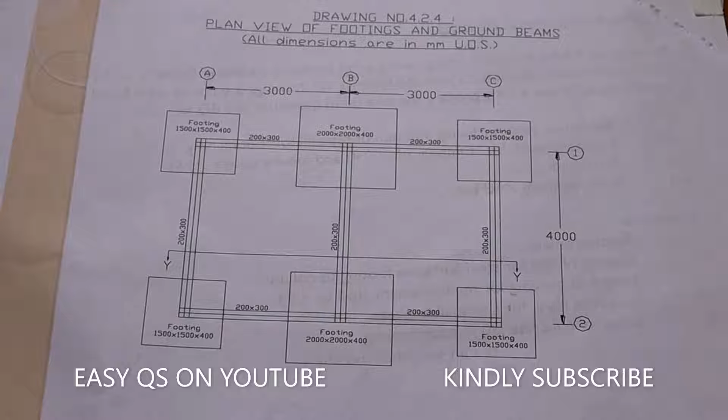You'll be given a plan and a section. In this plan that you have today, it has 6 columns.

There's this column measuring 1500 by 1500 by 400, the size of the footing of the column, and this column is equal to this column, this one, and this one. So there are 4 columns of the same size.

Then we have this other column which measures 2000 by 2000 by 400. The column is this one, and it is the same as this column, so these 2 columns are of the same size. The footing measures 2000 by 2000 by a thickness of 400. These other ones, as we have said, they are 1500 by 1500 by 400.

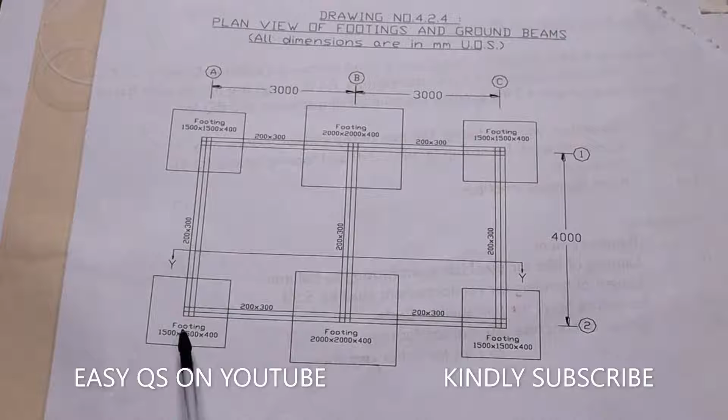The columns are joined by ground beams. You see, in our drawing today, it has footings of columns and ground beams. We know that we are taking off the foundation of the columns and the ground beams. So the footings of the columns have columns, and then they are interconnected by these ground beams that you can see. The size of these beams is 200 by 300.

The measurement of these footings is center to center 3000, center to center 3000. For the width, the width is 4000 millimeters. All right, so that one is the plan.

So we have taken section Y. We are viewing the columns this way. You see the arrow points this way. So we are viewing the columns this way. So in the section, we shall have this one.

So the footing that measures 1500 by 1500 by 400. We can see the concrete thickness is 400. Then below the concrete, we have a hard core of 50 millimeters. The section of this column is the column measures 200 by 200.

The reinforcement is R6. Then the reinforcement at the corners, that is standing, is 4 Y12. Then at the footing, we have reinforcement, which is U. We are told there are 5 Y16 both ways.

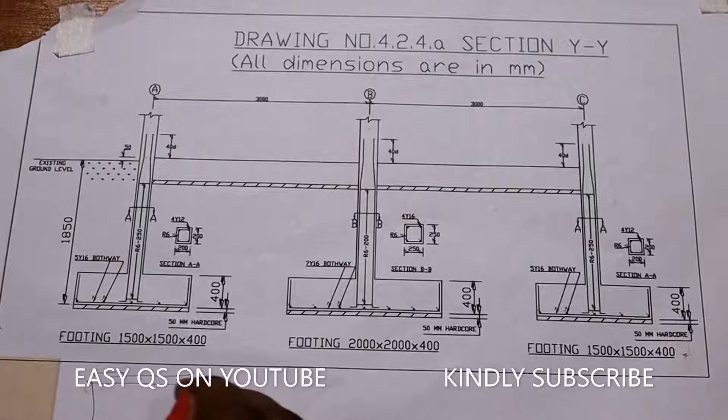So there are 5 Y16 this way, going this way, and also if the column is rectangular, we have Y16 going this way, and also this way. So when you are told 5 Y16 both ways, there are these Y16 going this way and the ones going this way.

Then from the footing of the column, we have these reinforcements that are standing. This part of the column is called the stump. Then this part which has the wide concrete is called the footing. The footing is this concrete below here, which thickness is 400.

The stump is this column below the ground up to where the ground beam begins. Then the ground beam begins from here to here. And we can see this level is below the existing ground level.

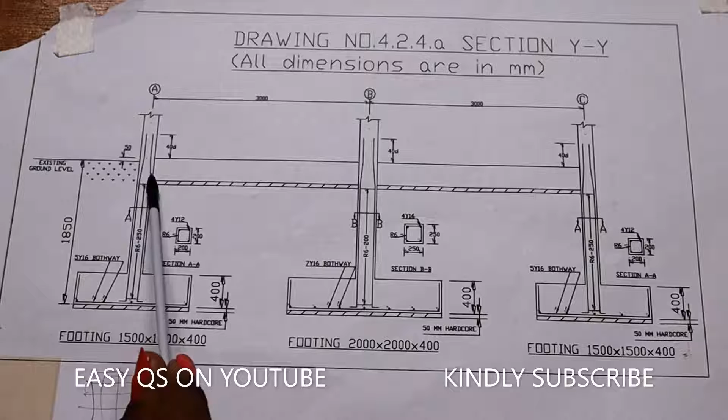Then the reinforcements, when they come above the ground, they should have some extensions which are ready for overlap. You see, the column has to continue upwards. Here it's in the ground. So we shall give an allowance to the reinforcement bars for the sake of lapping with the reinforcements that are above the ground.

When we come to this footing of 2000 by 2000 by 400, we can see it's just like the other one. It has a base of 50 millimeters hardcore. The thickness of the concrete here, the footing, is 400.

Then the section BB, we can see that the size of this stump or the column that is going upwards is 250 millimeters by 250 millimeters. The type of reinforcement in the stirrups are these reinforcements that are going round and round with a spacing. They are R6. The reinforcements at the corners which are going upward, they are standing, they are 4 Y16.

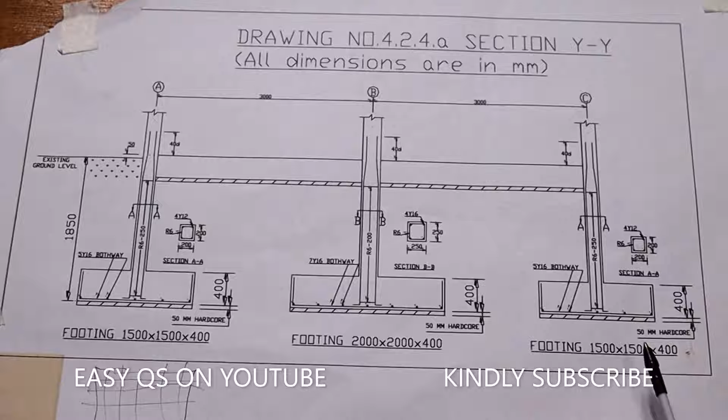So the reinforcement at the footing, it is 7 Y16 and it's both ways. So this way it's 7 Y16 and this way it's 7 Y16. This footing of 1500 by 1500 by 400 is the same as this other column.

So we shall begin the takeoff of the columns together, the columns in the foundation together with the stirrups. The takeoff list.

We shall do excavation work, which will involve the removal of 150 millimeters topsoil for footing only. Then we shall do concrete. We shall measure all concrete work for the stump and the footing.

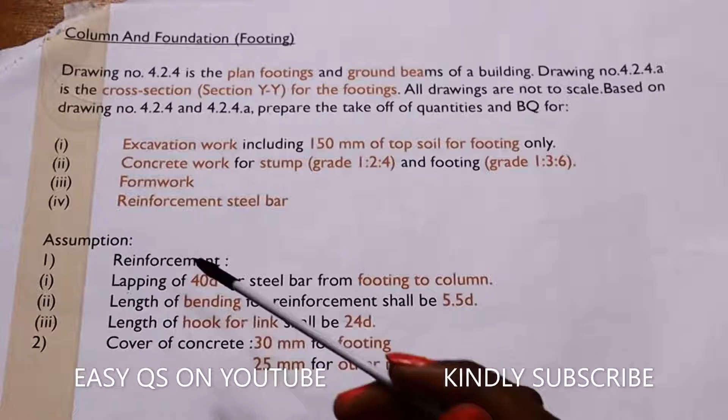We have said the stump is that column below the ground before you get to the ground level. The footing is that wide part of concrete that is under the column. We shall take off the formwork, we need to measure that. Then we shall measure the reinforcement steel bars.

Key things to remember when taking off such a diagram is that for the reinforcement, we shall have some basic assumptions that we use.

One is that the lapping is 40D, meaning if the diameter of the bars is Y12, the diameter of that bar is 12 millimeters. So to calculate the length of the lapping, we take 40 times the diameter, which is 12, divided by 1,000 to make it in meters. We get 40 times 0.012 for the steel bar from footing to column.

The lapping from the footing to the column, above the ground, that overlap that needs to be left, it's 40D. Then the length of bending for reinforcement shall be 5.5D.

What do I mean by this? The bending is this: in reinforcements, we always have bars that look like this. It's a straight bar, then it has bends at the corners, at the ends. If you want to calculate the length of this bend, you take 5.5 times D. So if it is Y12, like D12, you take 5.5 times the diameter, which is 12.

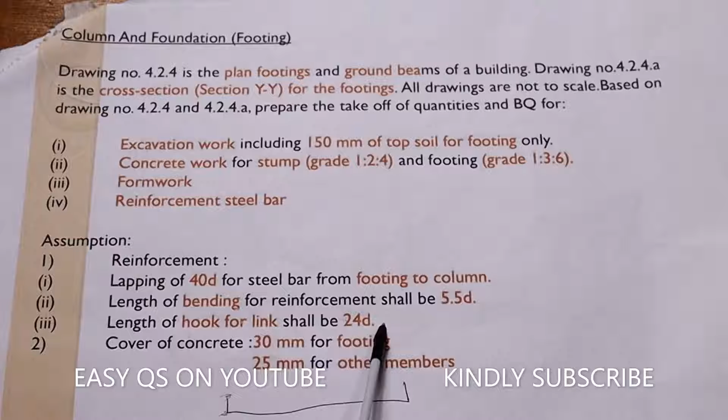The length of the hook for a link shall be 24D. The link is the stirrup, which is usually like this: a straight bar with ends at the corners. We have reinforcements at the corners, 5.5 times. So the length of the hooks at the corners shall be calculated as 24D. These are basic formulas that we shall use.

Then the cover for the concrete: at the footing, the concrete cover shall be 30 millimeters, and for other members, like the ground beam, it shall be 25 millimeters. These are some of the things to note when we are taking off.

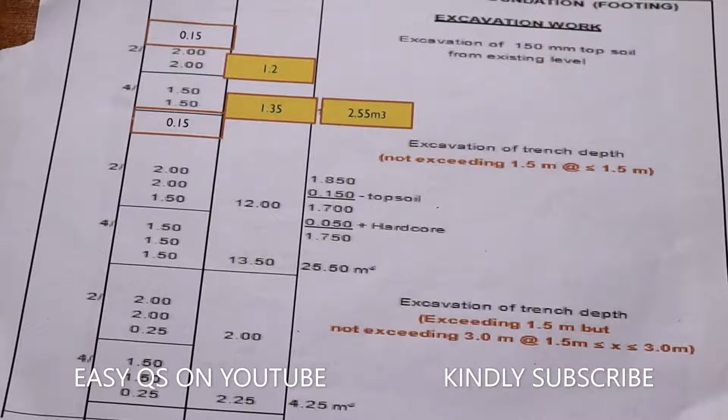Then we shall now begin the taking off. We said we will begin with excavation works. When doing excavation works, we need to measure the size of the column footing so that we can know what volume of soil we need to excavate.

We shall begin with excavation of the topsoil. The topsoil is 150 millimeters thick from the existing level. We shall excavate the topsoil at the footings. These are the footings of the columns that we have.

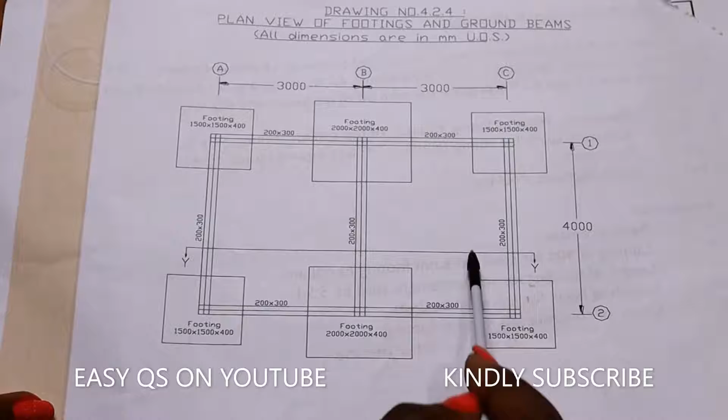When we are excavating, we need to come and excavate this area, everywhere where we have the column footing. We excavate the topsoil, then we excavate for the footing. So what is the volume we shall excavate in this column? It shall be 1.5 meters by 1.5 meters, the area.

For this one it shall be 2 meters by 2 meters, 1.5 by 1.5. So in simple terms, how many 1.5 by 1.5? 1, 2, 3, 4. So you will find out that we have 4 columns which measure 1.5 by 1.5.

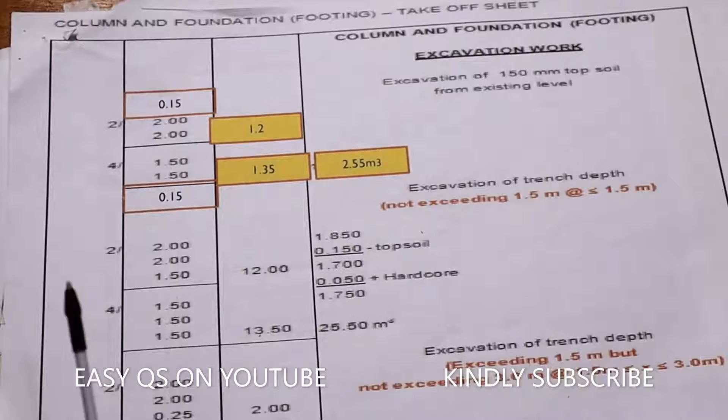We shall go now to the 2 by 2 columns. There are 2 columns measuring 2 by 2.

When we come to calculating the total area that we shall excavate, a volume of soil 150 millimeters thick, it shall be 2 times 2 times 2, then multiplied by 150, the thickness of the soil. So 2 by 2 by 150 to get the volume of the soil, we get 1.2.

Then for the other 4 columns, which measure 1.5 by 1.5, to get the volume of the soil, shall be 4 multiplied by 1.5 by 1.5 by 0.15, so that you get 1.35. So the total volume of soil that we shall excavate shall be 2.55 meters cubed.

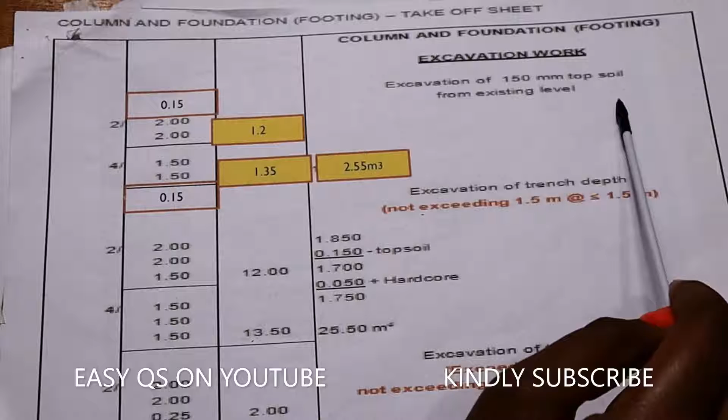In books that give you guidelines, for example if you're using the SMM, taking off will be determined by the type of guidelines you use. In Kenya, we use the SMM. If the SMM instructs us to calculate and excavate the topsoil in terms of area, we shall not put 0.15 here, we'll just take the areas alone. Then we write excavation of 150 millimeters topsoil from existing level, and multiply by 0.15 to get the volume in the description column. But this is for general guidelines that you can use.

This is the method. Then you need to go and check in your guide if it's the SMM, if it's the NRM2, if it's the ARM4.

So you can be able to use your guidelines in taking off. This one is the general taking off.

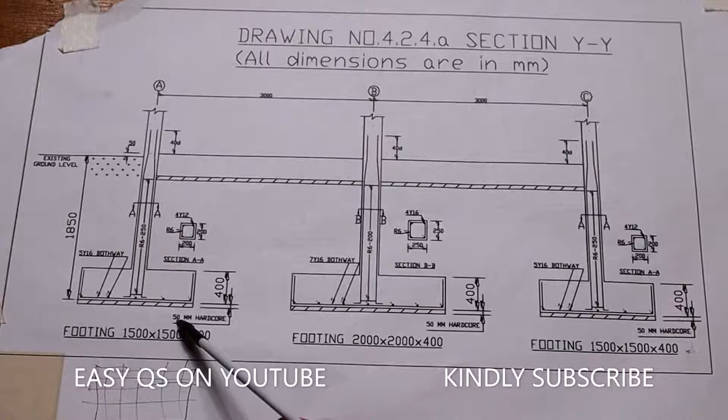You can see from the section, the footing is 1500 by 1500 by 400 from the ground level. This depth is not for the topsoil alone. We can see it is going from the ground level up to the base of the column, which is 1850. Then we have 50 millimeters for the hardcore, so the total depth shall be 1850 plus 50.

So we need now to excavate the remaining part. We have already excavated 150 millimeters topsoil, and our total depth is 1850 to get down here, together with plus 50 here down. So the total depth that we are excavating is 1900. We have already excavated 150, so what depth do we need to dig further?

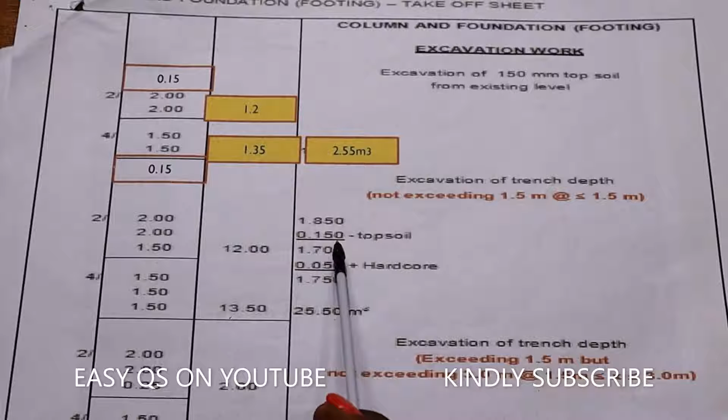And that is when we come to excavating here. It shall be 1850, we deduct 150 for the topsoil, we remain with 1.7. Then we add more excavation for the hardcore, which is 50 millimeters, we get 1.75. So we need to excavate a total volume of the length, the width of the column base, then a depth of 1.75.

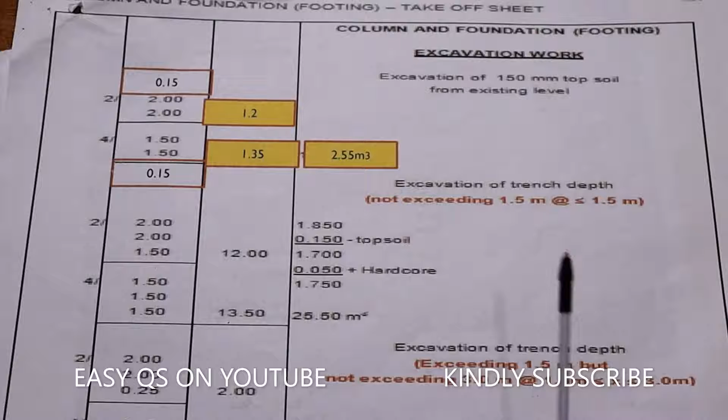According to guidelines, you excavate according to ranges. For example, in the SMM we are told to excavate in ranges of 1.5 meters. So you will excavate the first 1.5 meters separately, then you will excavate the remainder separately if it does not exceed 3 meters.

The width of the column base, then a depth of... So for the volume of soil that you excavate using the first 1.5 meters, you will take the size of the footing, which is 2 meters by 2 meters, then the depth is 1.5 meters, because we are excavating in ranges of 1.5. If the total depth is 1.75, the first 1.5 will be separate, so it shall be 1.75 deduct 1.5. The first range shall be 1.5, the second one shall be the balance, which is 0.25.

So when you're excavating the volume of the soil for the columns, it shall be the size of the column, 2 meters by 2 meters, then the depth is 1.5. How many columns measure 2 by 2? 2 columns. 4 columns measure 1.5 by 1.5, then the depth of excavation is 1.5.

So the total volume of soil we shall excavate using the first range, which is 1.5, it shall be this 12 and this one 13.5. So this total volume, which is 25.50, is excavation of trench depth not exceeding 1.5 meters, any range that is less than 1.5. Then we go to the one exceeding 1.5 meters but not exceeding 3 meters.

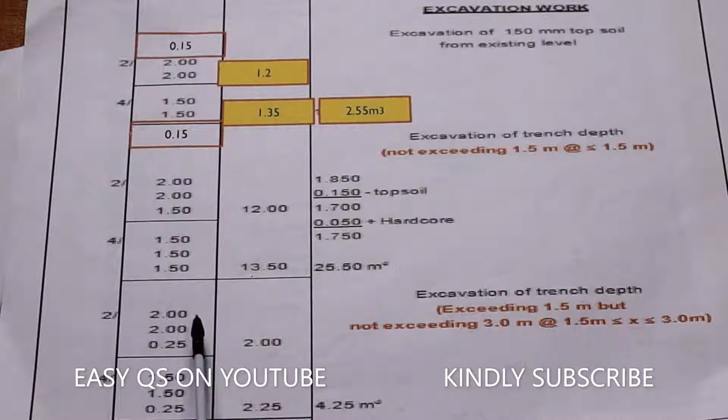So the volume of the soil shall be the length of the footing, 2 meters by 2 meters, then the extra depth, which is 0.25 for 2 columns. For the 4 columns, it shall be 1.5 by 1.5 by the remaining depth, which is 0.25. So the volume shall be 2.25, and the first volume is 2, so the total volume of soil in the next range of 1.5 meters shall be 4.25 meters.

So what is the total volume of soil that we have excavated? The total volume of excavation shall be these 2.55, 25.50, and 4.25 meters cubed for the excavation.

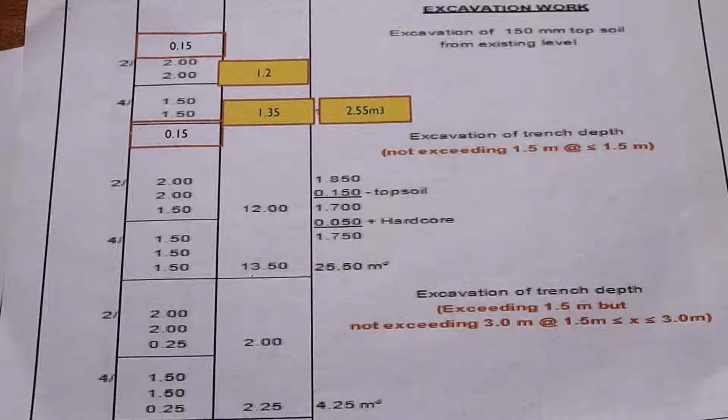All right, so the volume and the first volume, what is the total volume?

We shall move on to the next part, which is the concrete work. Remember, we have our footings. Our footings, we can see here, it's 1500 by 1500 by 400. This one is 2000 by 2000 by 400.

So if we are taking off for the 2000 by 2000 by 400, what is the volume of this concrete at the footings? So at the footings, we have the length, which is 2000 by 2000 by the thickness, which is 400. How many columns measure 2000 by 2000?

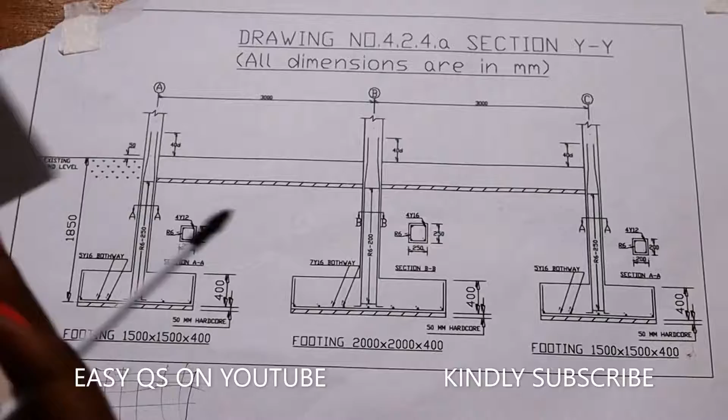2 columns. So when it comes to booking it, it shall be 2 columns measuring 2 meters by 2 meters by 400 millimeters thick. So it shall be 3.20.

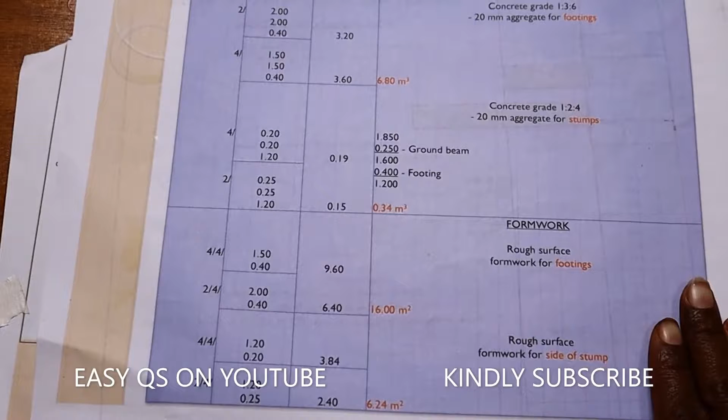For the other 4 columns, the footings measure 1.5 by 1.5, and the thickness of the concrete is 0.40, so it shall be 3.60. So the total volume of concrete in the footings shall be 6.80 meters cubed.

That is the concrete grade. You just do your assumptions if you're not told in the drawings, like concrete grade 1 is to 3 is to 6, 20 millimeters aggregate for footings.

Then we go to the stumps. Remember, I have already explained to you that this part of the column is called the footing, this below here which is wide concrete. The stump is from this part to this part, up to the ground beam. So we are taking off now the stump.

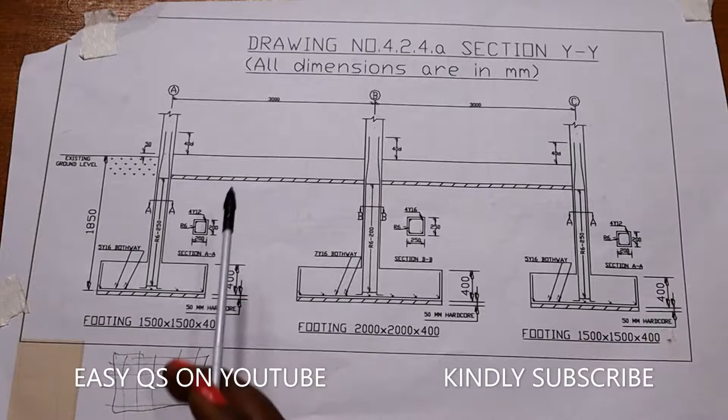The concrete in the stump, what is the volume of that concrete? We are told the length of the stump is 200 by 200, so we just need to calculate the depth. For the 2000 by 2000 footing, it is 250 by 250. So we just need to calculate the concrete at the stump.

So what is the depth from here up to here? That one we shall find out. If from here the ground level up to below the column footing is 1850, then we shall deduct the ground beam, from here up to here, which is 250.

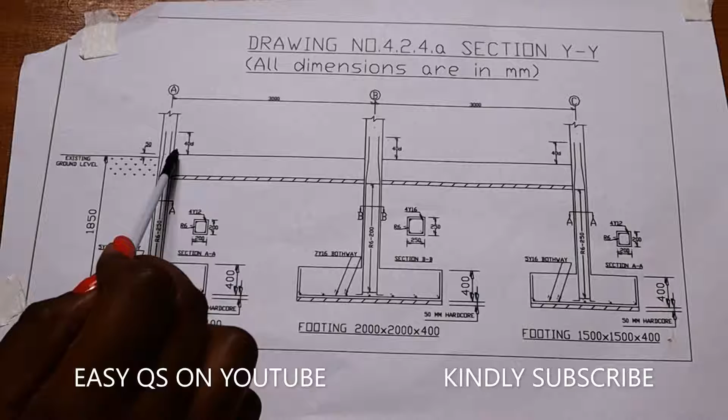Then we shall deduct the footing, which is 400. So I come again from the ground level to here, it's 1850. Then the thickness of the ground beam is 250. How do we get that 250?

The thickness of this ground beam is 300. Then you deduct 50, which is from the top of the ground beam to the ground level. So 300 minus 50 is 250. So 1850 minus 250, then you deduct 400. So it shall be 1.85, deduct 0.25, then deduct 0.4.

So the height of the stump is 1.2 meters. So what is the volume of concrete in the stump? For the footing that is 1500 by 1500, the stump size will be 0.2 by 0.2 by 1.2 meters, for 4 stumps.

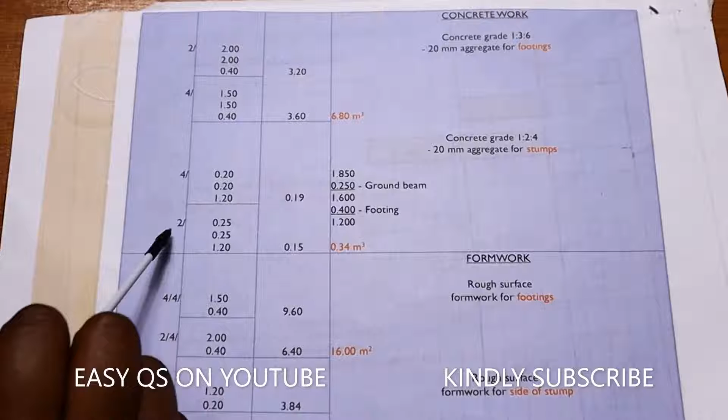For the one measuring 250 by 250, there are 2 stumps for the 2 footings, so it's 2 by 0.25 by 0.25 width by a depth of 1.2. So the volume of concrete in that stump is 0.15. So the total volume of concrete in the stumps shall be 0.19 and 0.15, giving a total of 0.34 meters cubed.

Alright, so we shall now go to the formwork, in the footings together with the stump. So the formwork in the footing, we can see the footing is 1500 by 1500. We shall start with the columns at the sides of the footings. If the footing measures 1500 length, 1500 width, and the depth is 400, we want formwork for the sides. This one we will calculate in terms of area. So for this side of the footing, it shall be 1.5 meters by 0.4 meters.

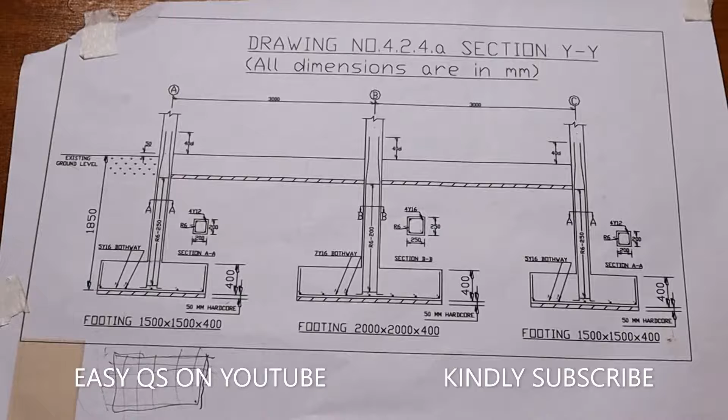How many sides does the column have? Remember, it's a square, so this side is 1.5 by 0.4, 1.5 by 0.4, 1.5 by 0.4, then 1.5 by 0.4 again. So there are 4 sides of the column footing measuring 1.5 by 0.4. And how many columns measure that? 4 columns. So 4 columns with 4 sides measuring 1.5 by 0.4, giving a total area for the footing formwork for the sides of 9.60.

The other one is there are 2 columns with 4 sides measuring 2 meters by 0.4. So the area of formwork we need for the footings, because we only support concrete at the sides of the footing, the other part being laid on the ground, the total area of that formwork is 6.40. So the total shall be 16 meters squared.

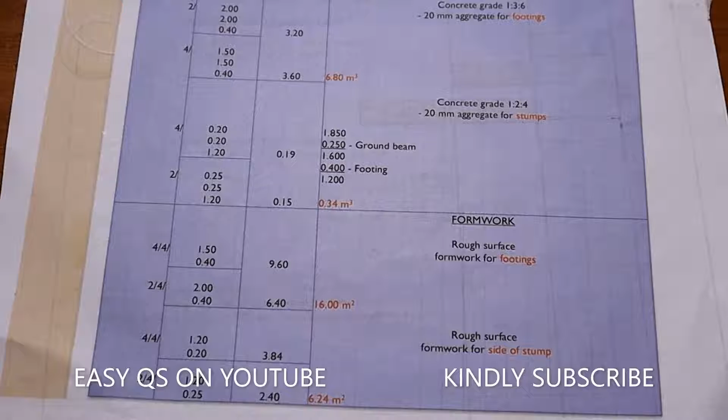Alright, so we shall go to formwork for the sides of the stump. The stump, as I had already shown you, is this part. We need to support it, the formwork, on all sides. We can see the cross section of the stump here. We need to support the formwork here, here, here, and here. So what is the area of one side? Then, because it's a square, it's multiplied by 4 sides.

As you can see, this stump measures 200, so it shall be 0.2 times the height of this stump, which we had already calculated, which is 1.2. Remember, when you calculated the height of the stump from here to here, it's 1.2.

So it shall be 0.2 times the height of 1.2. That is the area of formwork on one side. Then it's a square, and a square has 4 sides. So for 4 sides, we multiply by 0.2 by 1.2. Then we multiply by the number of columns, which is 4.

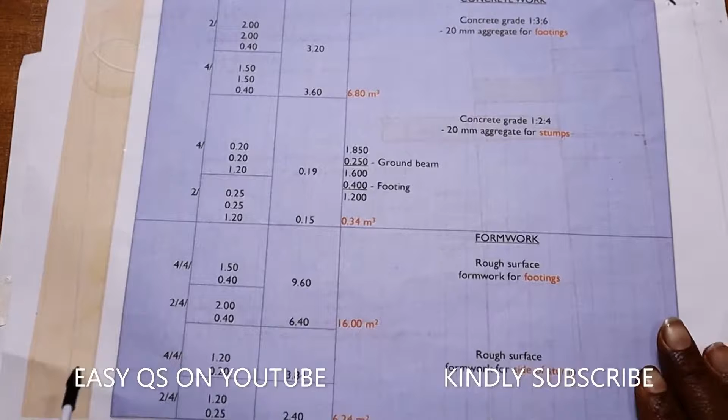So when you're booking it, it shall be: we have 4 columns, 4 sides, the height is 1.2, and the length is 0.2. We get 3.84. Then for the other stump, we have 2 columns, so 2 stumps, with 4 sides each, and one side measures 0.25 with a height of 1.20. So the total area of formwork at the sides of the stump is 2.40. So the total area for the sides of the stump is 6.24 meters squared.

Alright, so now we shall continue to taking off the reinforcements at the footings of the column.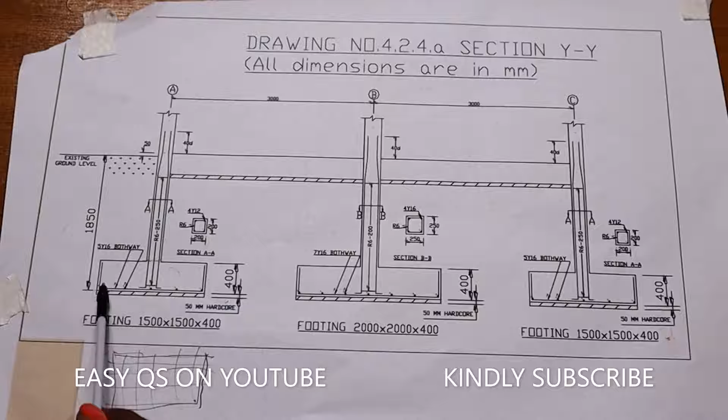Alright, so you can see at the footing we have reinforcements. We are told we have this one, which is 5Y16, and it's both ways. So this one that you can see, and also these ones at the ends, it is 5Y16. So it's 1, 2, 3, 4, 5. Then on the other side we have 5 reinforcements.

So how do we take off the reinforcement? For the reinforcement, we shall begin with either of the footings, and for this case we shall begin with this footing measuring 2 meters by 2 meters by 400. So we need to know how many reinforcements we will use and the length of each reinforcement. So to get the length of this reinforcement going this way, and this footing is 2 meters, what is the length of this reinforcement bar? It shall be 2 meters.

We deduct the cover. Between this reinforcement here and the end of the concrete here, we have this space, that space is called the cover. The reinforcement bars do not go to the end, because after concrete is done, the reinforcement bars should be hidden inside the concrete. So the space between that reinforcement bar and the end of the concrete is called the concrete cover. So when we are looking for the length of this reinforcement bar, we have to take the total length of the column, then we deduct the cover this side and cover this side.

The covers, we had already said that we will use a cover of 30 millimeters. So if it has a cover of 30 millimeters here and 30 millimeters here, and this base and this footing is 2000, so the remaining length that should have the bar is 2000. We deduct 30 times 2, which is 60.

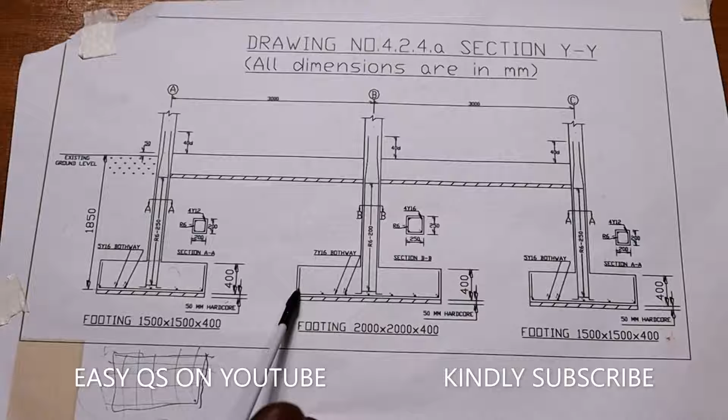Then we have this bend. You can see this reinforcement bar has a bend here, then it has a bend here. We have to add the length of that bar. So the formula that we shall use, it shall be we take 5.5 times diameter. Every bend here measures 5.5 times diameter. In other cases, you will find us using 400. We deduct the cover up and we deduct the cover down. So in this example, we shall use 5.5D. But we shall also do another example that shows, if you're not using 5.5D, how you deduct the cover on top and then the bottom. So you should keep tuned so that you can find that video. So in this case, the bend is 5.5D.

So if the reinforcement is Y16, the size of the bend shall be 16 times 5.5, 16 millimeters times 5.5. So it shall be 5.5 times 16 over 1000, so that you can get the length of that bend.

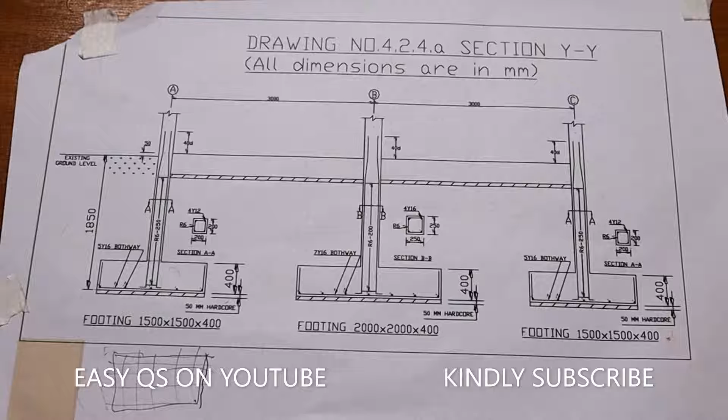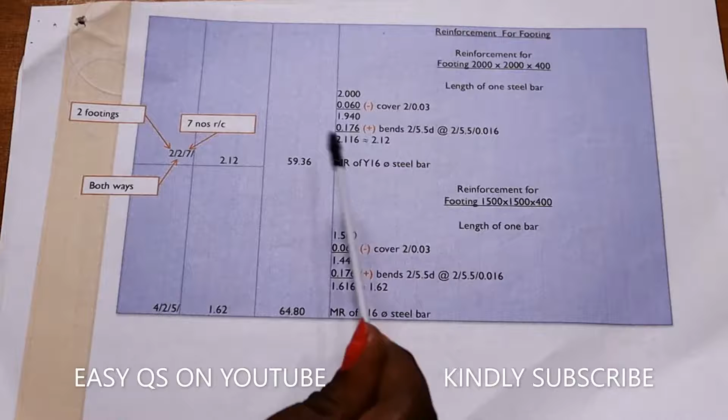Alright, so in booking, in the description column, you shall write the length of the footing is 2 meters. Then we shall deduct the cover on both sides, it shall be 0.06, so you shall remain with 1.94. Then you add the bends, which is two bends. Each bend is 5.5D, so it shall be 2 bends times 5.5 times the diameter, and it shall give you 0.176. So the total length of each steel bar shall be 2.12.

Then when we are booking it here, it shall be MR of Y16 diameter steel bar. So we have 2 footings measuring 2000 by 2000, and it is both ways, on the length side of the column and on the width side. Then we have 7 numbers. Where did we get 7 numbers? It's because we are already told here it's 7Y16, so there are 7 in number. Each way it's 7, so 7 numbers.

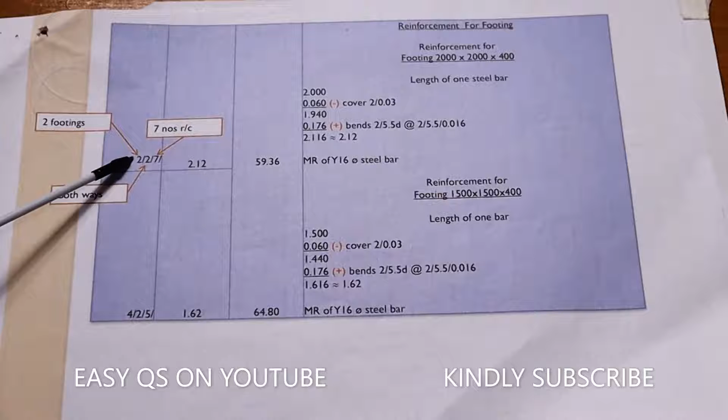Let me come again. 2 footings both ways, 7 number in each way, then the length of the bar is 2.12. We shall get 59.36 RMR of Y16 diameter steel bar.

Then we shall go to the reinforcement for the footing measuring 1.5 by 1.5 by 400. What is the total length of bars that we shall buy? The length of one bar, the total length of the footing, is 1.5.

We deduct the covers because the reinforcement should not go up to the end. The size of the cover on either side is 30 millimeters. After you deduct the covers, which is 60 millimeters, then you add the size of the bend. In this case, we are using the size of the bend as 5.5D, and there are two bends.

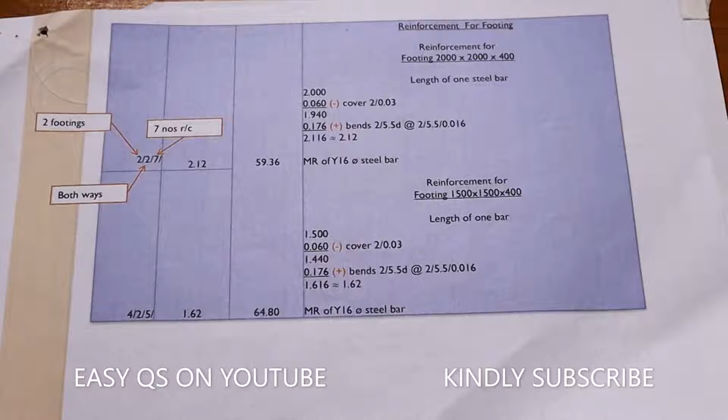So 2 times 5.5 times diameter 16 over 1,000. So it shall be 1.44. We add 0.176, we get 1.616.

So when we are booking it, we have 4 footings both ways. Each way is 5 reinforcements, and one reinforcement measures 1.62. So the total length of reinforcement shall be 64.80 RMR of Y16 diameter steel bars.

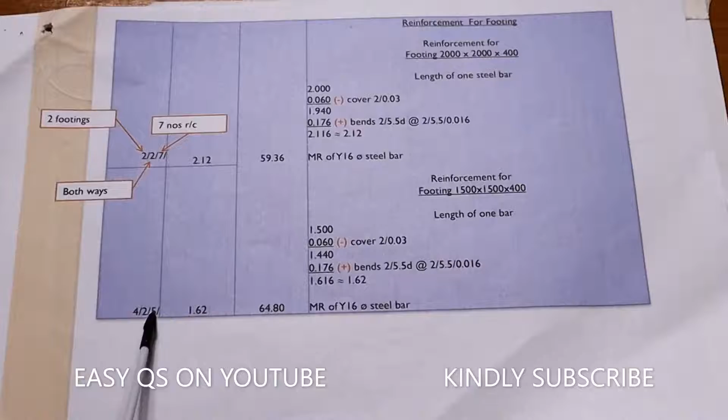This 5, we have already said that we get it from the section. You can see it's 5 Y16 both ways.

Now we shall go to reinforcement at the stump. You can see that the concrete, when we are measuring concrete in the footing, we take this one. But when you are measuring concrete in the stump, we take from here to here as the height.

But now we are talking about reinforcements. Despite the fact that concrete is here at the footing and here at the stump, when you are doing reinforcement, the reinforcement at the stump will come into the footing. This height shall be measured in the stump, because this reinforcement coming into the footing from the stump is for the stump. So we are going to calculate the length of the bars in the stump.

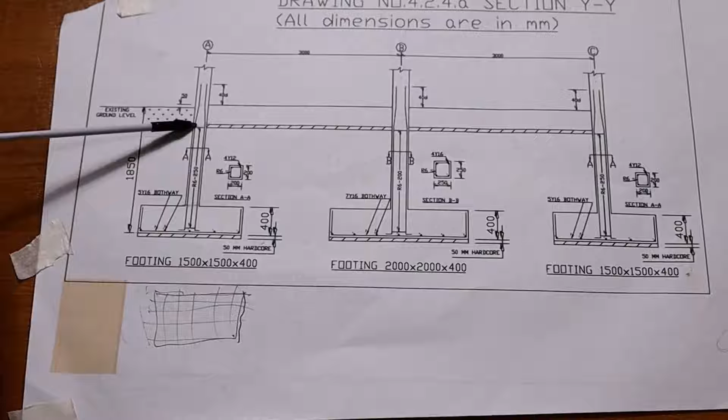We deduct this 50. The distance from the top of the ground beam to the ground is 50. So we shall take 1850, we deduct 250. Then we shall add the depth of the ground beam.

So after we have deducted 250 to the bottom of the ground beam, we shall add 300, so that we can get up to here, up to the top of the ground beam. Or else we can take 1850 plus 50, because we want the depth from here up to here.

Then we need to deduct this cover at the below here. You see, these reinforcements are coming into the footings, and they do not get to the bottom of the footings. We have to have a concrete cover. So we shall take 1850 plus 50, 1900. We deduct this cover, which is 30 millimeters.

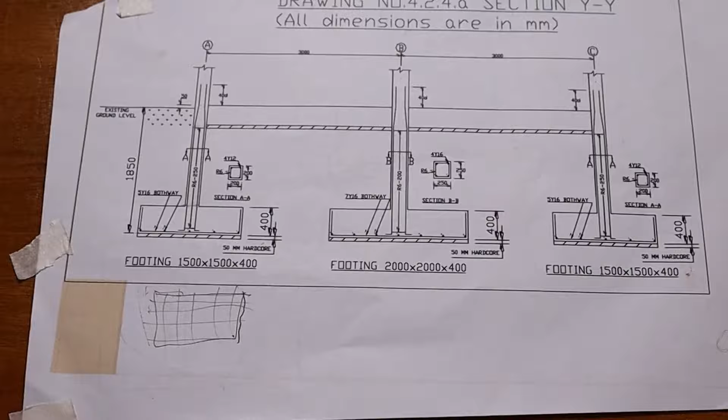Then we need to deduct also 2Y16. Why 2Y16? Here below the footings we have reinforcements going this way and reinforcements coming this way. Remember, this is the footing of the column. We have reinforcements coming this way and reinforcements coming this way.

Then we have the reinforcements attached to it. So for this reinforcement, it lies on 2 reinforcements, one coming this way and another one below that one going this way. Then we need the concrete cover. So we need to deduct the concrete cover first of 30 millimeters, then we need to deduct the thickness of two reinforcement bars, one below, then the other one on top.

Then this bar is on top of those ones. So the thickness of one bar of Y16 is 0.016 meters. If there are 2, it shall be 0.016 meters times 2, because there are 2 Y16s.

Then we need to add the length of the bend. You see these bars, they have some bend. What is the formula for finding the length of that bend? It is 5.5D. So 5.5D, it shall be, if the diameter of these ones coming this way is Y16, it shall be 5.5 times 0.016.

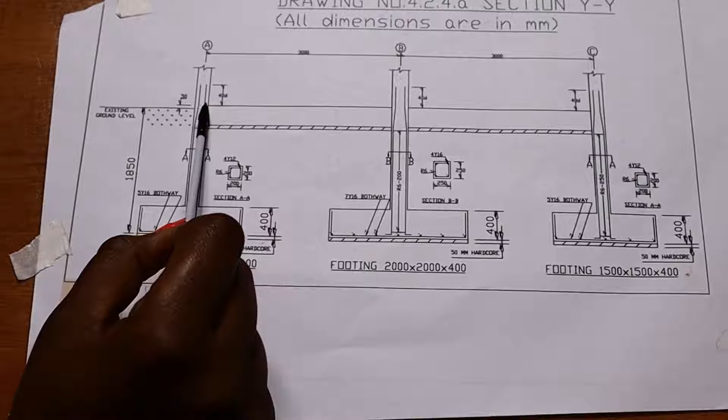So we need also to add some length from above the ground beam for the overlaps, so that it can be able to lap with the reinforcements coming from up there. What is the length that we allow for overlap?

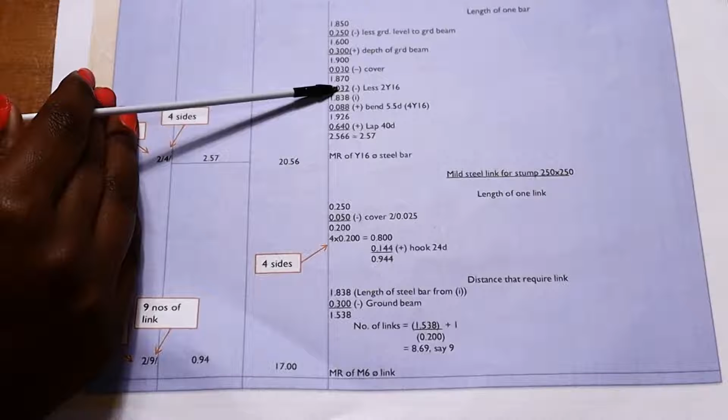It is 40D, so if the reinforcement bar is Y16, it shall be 40 times 0.016. You can see the full calculation here, whereby the length of the bar shall be: the total depth is 1.85. You deduct for the ground beam to get to the bottom, then add for the ground beam to get to the top, then deduct the cover at the bottom, then deduct the thickness of two Y16s below that reinforcement bar. Then add the bends, two bends, then add the length for the overlap. So the total length of one bar in a stump of 250 by 250 shall be 2.57.

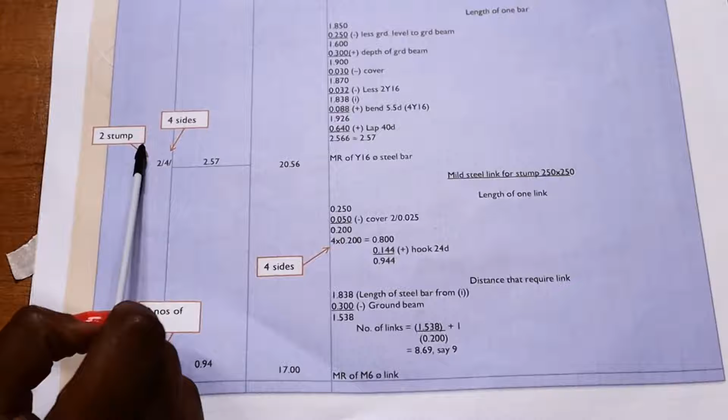So we have two stumps, each measuring 250 by 250. We have four sides, four reinforcements. Why four? Because if you can see, we have this column, we have four reinforcements at the corners. So we have two stumps, four reinforcements in each stump. The length of one reinforcement is 2.57, so the total length of all the bars is 20.56, for Y16 diameter steel bars. Now that is the length of the bars for the stump measuring 250 by 250.

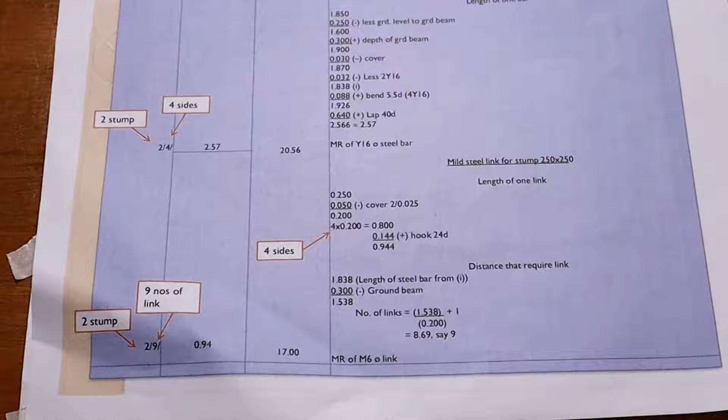Now those are the bars that are standing. We need to calculate the length of the stirrups, these ones that go around in rings. So they are called the stirrups, and also they are called the links. We need to calculate the length of the links. If I'm to sketch them, they are rectangular, curved rectangular, then they have some hooks. If they are like that, we want to find the total length of this stirrup.

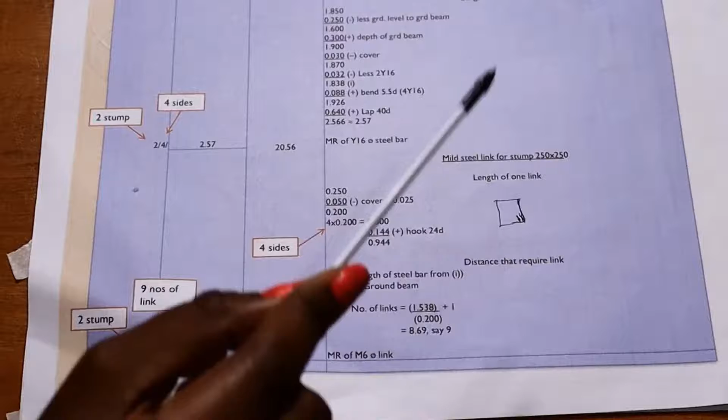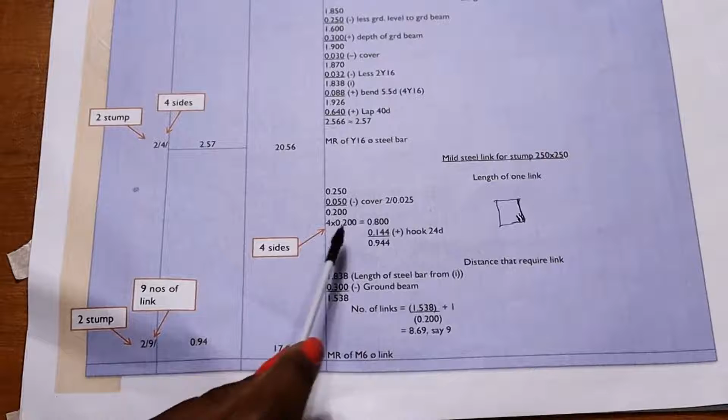So if the length of this stirrup is 200, removing the cover all around, it shall be 0.8. Then we add the length of the hooks. One hook we use 24D, so if it's a diameter of D6 for the stirrup, we use 24 times 0.006. So the total length of the stirrup shall be 0.944. That is the total length of the bar required to do one stirrup.

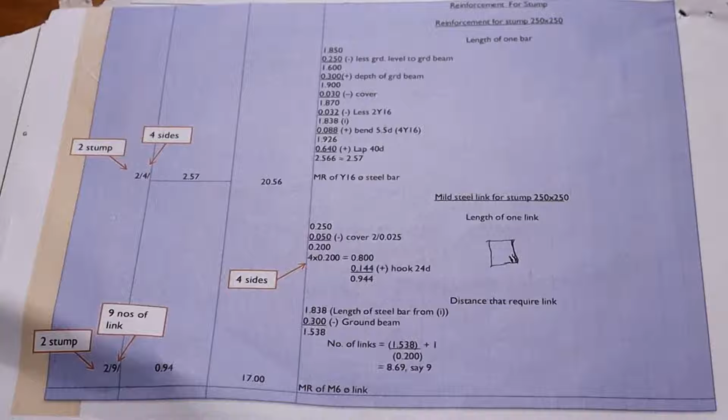How many stirrups do we need? That is what we shall calculate here. The stirrups shall be distributed from below the ground beam to below here, inside the concrete footing. So the stirrups shall begin above the concrete cover and above the two reinforcements for the footing, then be just below the ground beam. So what is this depth from here up to here? We take the total depth here, which is 1850, then deduct the ground beam, then deduct the cover and the two reinforcement bars below here, and it gives us a total depth of 1.538.

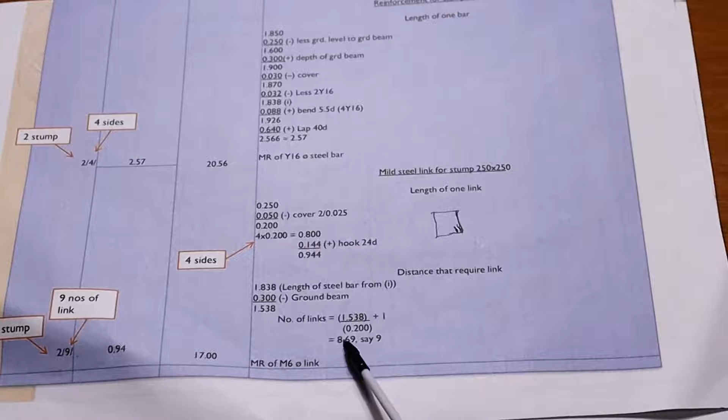We are told the spacing of the stirrups is 200, so it shall be 1.538 divided by 200 plus 1, which is 8.69. So say 9 stirrups. We have 2 stumps, 9 stirrups in each stump, and the length of bar for one stirrup is 0.94. So the total length of bars we shall buy to do the stirrups shall be 17 meters. So we are done with the length of the bars for the stumps in the 250 by 250 column, and we have calculated the total length of the stirrups.

Now we shall go to the stump measuring 200, together with the length of the stirrups. Remember, we are done with this stump measuring 250 by 250, but this one measures 200 by 200 because the size of the footing is small.

So this one is the one that we are taking off now. The length of the bars coming down the stump, we shall calculate it just like the other one in terms of height. So the height shall be 1850.

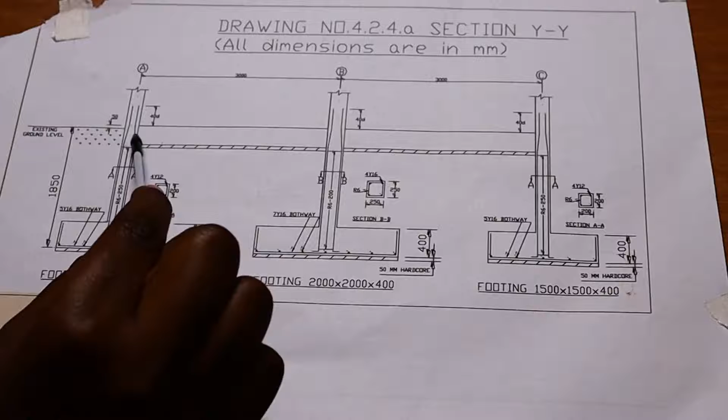Then we shall deduct 250 up to below the ground beam. Then we add 300 to get up here, or we take 1850 plus 50 so that we can know the length from here up to here.

So it shall be 1900. Then we shall deduct the cover of concrete below here, which is thirty. We deduct the thickness of 2 reinforcement bars of Y16. Then we shall add the length of the bends here, and each bend is 5.5D. So 5.5 times the diameter, because the reinforcements coming down the stump are Y12 bars.

So it shall be 5.5 times 0.012. Then we should give an allowance for overlaps with the column bars coming from the top. The lap is 40D, so 40 times the diameter of those bars, which is 12. So it's 40 times 0.012. The total length of the bars coming up shall be 2.384.

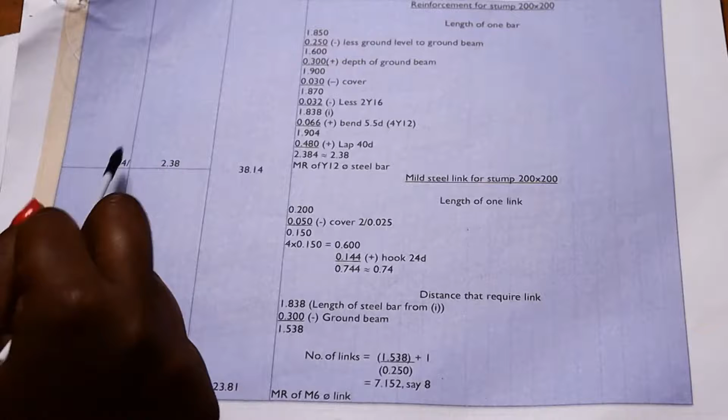If you follow this calculation, you'll be able to understand the total length of that bar, where it's coming from. So how many reinforcement bars do we have in each stump? We have 4 reinforcement bars in 4 stumps. Each reinforcement bar is measuring 2.38. So the total length of the bars is 38.14.

Then we need to calculate the length of the stirrup. The stirrup, remember, in this case the stump measures 200 by 200. So if it's a square measuring 200 by 200, we have to do a cover of 25 this side, 25 this side. So it shall be 200 deduct 25, so 200 deduct 50, you get 150.

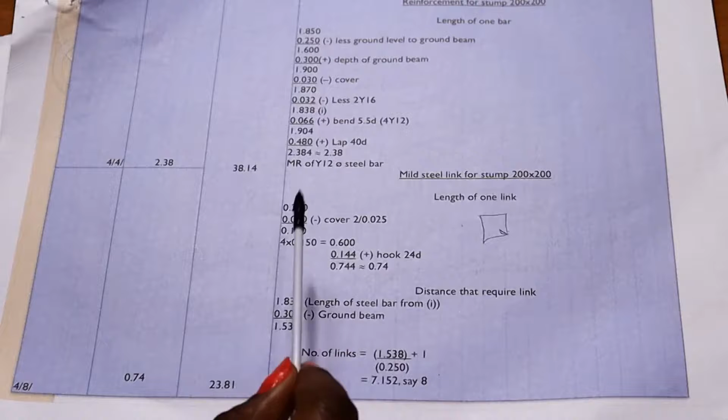Then we have how many sides of the stirrup? We have 1, 2, 3, 4. So we multiply by 4. So we shall get 0.60.

Then we add the size of the hook, and the hook is usually 24D. So 24 times the diameter. The stirrup is M6, so it is 24 times 0.006. So we shall get 0.144. So the total length of one stirrup shall be 0.74.

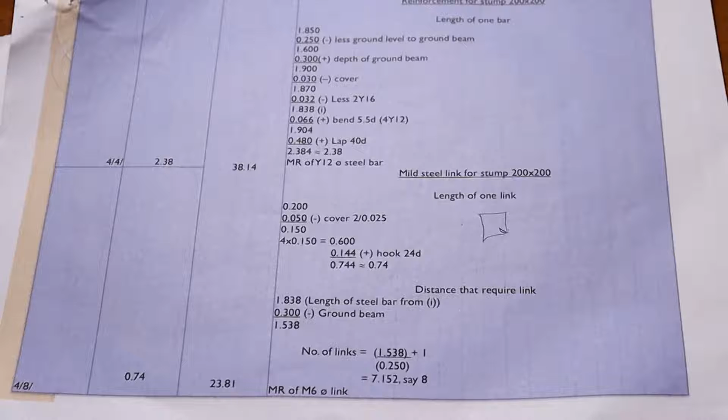How many stirrups? The total number of stirrups is determined by the height on which the stirrups are distributed. The stirrups are distributed from below the beam to above the concrete cover and above the 2 reinforcements in the footing. So the total length from here up to here is 1.538.

So we divide by the spacing of the stirrups. You see the spacing of these stirrups is written here. The spacing of these stirrups is 250. For this one it was 200. So this one you divide by 250 plus 1. So how many links do we have? It is...

7.152, so say 8. So when you are coming to book them, we shall say we have 4 stumps, so we multiply by 8 sides. No, we have 4 stumps, then we multiply by 8 number of stirrups. Each stirrup is 0.74, so we shall get the total length is 23.81 meters of R6 diameter link.

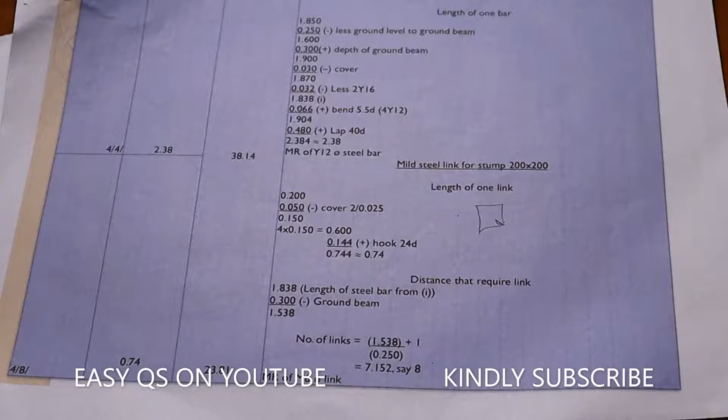We shall now look at how to book these takeoffs, the ones we have done, these bookings, in a bill of quantities. So we shall begin with the first one, which we used here. The first takeoff we did was about excavation. How do you book these things in a bill of quantities?

So we have the excavation work. We started with excavation of topsoil with 150 millimeters thick, and we got 2.55. So when you come to the bill of quantity, you see the bill of quantity is usually like this: there's the item number, the description, the quantity, the unit, the rate, and the amount. Remember, we usually just add the rate, then we multiply the quantity by the rate, we get the amount.

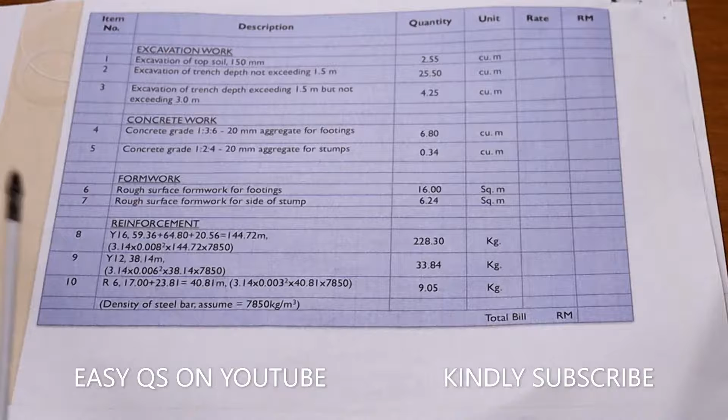So if we want to get the total cost for the excavation, concrete work, formwork, and reinforcement in these columns, column footings and stumps, we shall just add the total cost here.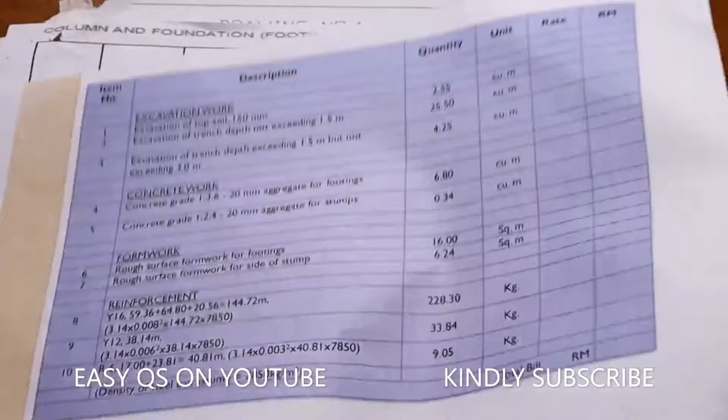So when we are coming to book it, we shall write excavation work. The first item, excavation of topsoil, 150 millimeters, and we write the total that we got, 2.55, in cubic meters. As you can see, we got 2.55 meter cubic. All right, we shall come to excavation of trench depth not exceeding 1.5. We got 25.50.

So we shall come and write excavation of trench depth not exceeding 1.5 meters. The total volume is 25.50 cubic meters.

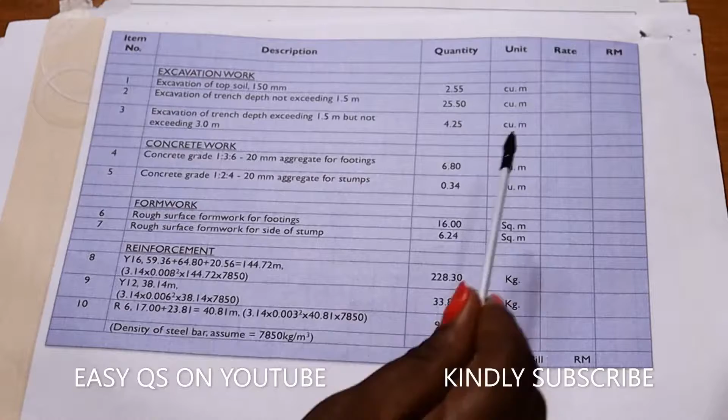We go to the third item, which is excavation of trench depth exceeding 1.5 but not exceeding 3 meters, and the volume of the soil is 4.25 cubic meters.

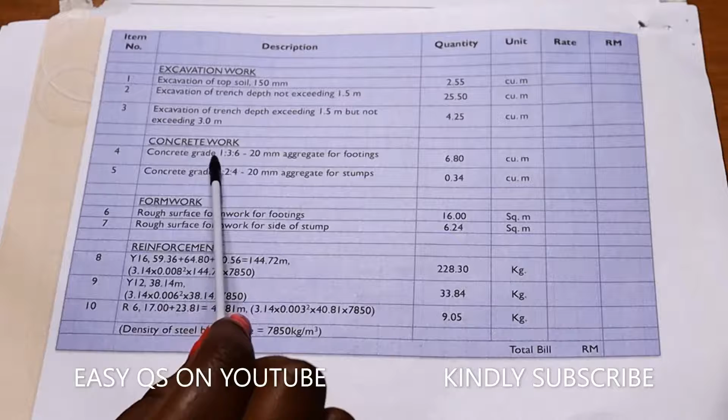We go to concrete work. We book the first item, concrete grade 1:3:6, 20 millimeters aggregate for footings. Where do we get the concrete? We shall get it in the takeoff that we did. We got 6.80, so we shall just come and add 6.80. So we shall go to the second item, concrete grade 1:2:4.

1:2:4, 20 millimeters aggregate for stump, we get 0.34 cubic meters. So we shall come and refer to it. We got 0.34.

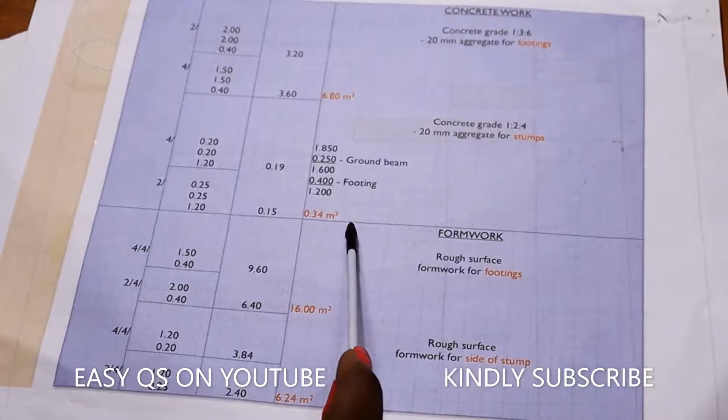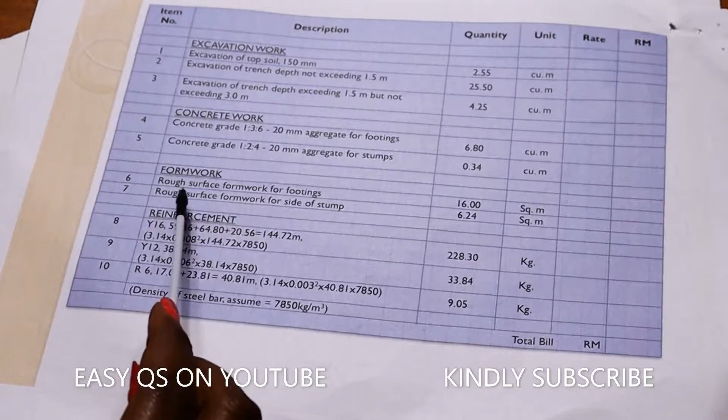All right, we come to the next one, formwork. Rough surface formwork for footings, we got 16 square meters. So we just write here, the item is formwork, rough surface formwork for footings, we get 16 square meter. The next one, rough surface formwork for side of stump, we get 6.24.

Can we confirm whether we got that? It is here, rough surface formwork for side of stump, 6.24 square meters. So we go to the next item, which is reinforcement.

When we are entering the reinforcements, we will begin with the Y16, then we go to Y12, then we go to R6. When we come to Y16, we will take all the values that we have got for Y16, then we will add them and get the total. For example, the one we did, the reinforcement for the stump.

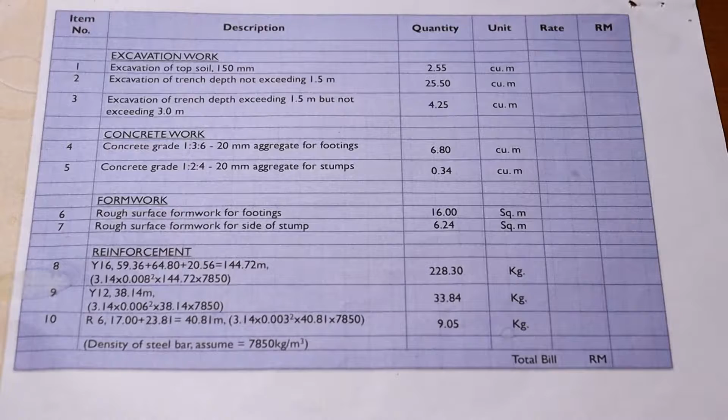We start with reinforcement for the footing, 2000 by 2000 by 400. The total length was 59.36. This is Y16. The next Y16 was the reinforcement for footing, base 1500 by 1500 by 400. We got a total length of 64.80. Then we got reinforcement for stump 250 by 250.

Y16 we got 20.56. So we shall take the total of the three: 59.36 plus 64.80 plus 20.56. We got 144.72 meters. When we are buying reinforcement, we buy them in kilograms.

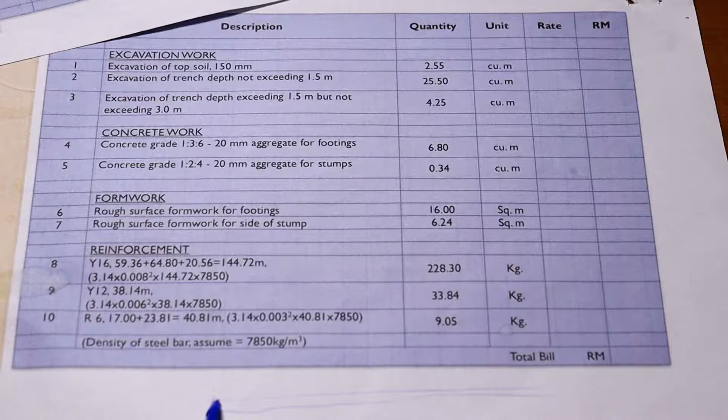How do we find the kilograms of 144.72 meters? We usually take pi R squared. A reinforcement bar is usually like a cylinder, so we take pi R squared cross-sectional area times the length. Pi, 3.14, times R - this one, Y16, was 16 millimeters diameter, so the radius shall be 8 millimeters, in meters 0.008, squared, times the total length of the reinforcement.

Then we multiply by the density of the steel bar to get weight, because mass equals density times volume. So we get 228.30 kilograms.

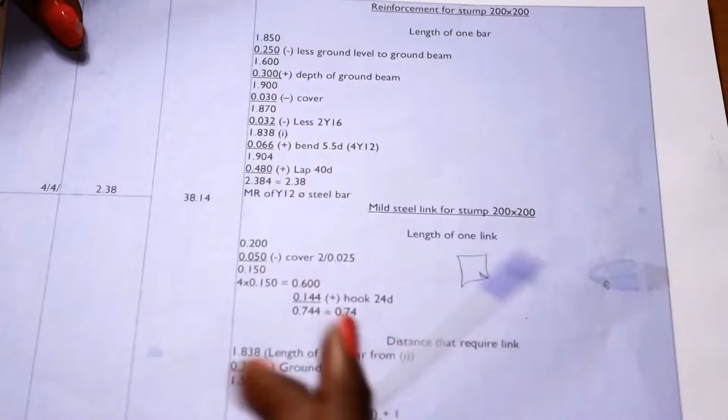For the Y12, we shall get the total meters, and Y12 was only used in the reinforcement for the stump 200 by 200, and the Y12 meters was 38.14. So we shall write 38.14. Then we calculate the total volume by taking pi R squared - Y12, radius of 12 is 6, times the length. We multiply by the density.

We get the mass. We go to R6. R6, we used R6 in the stirrups, and the stirrups, the first one was 23.81. Then there's another R6 that we got.

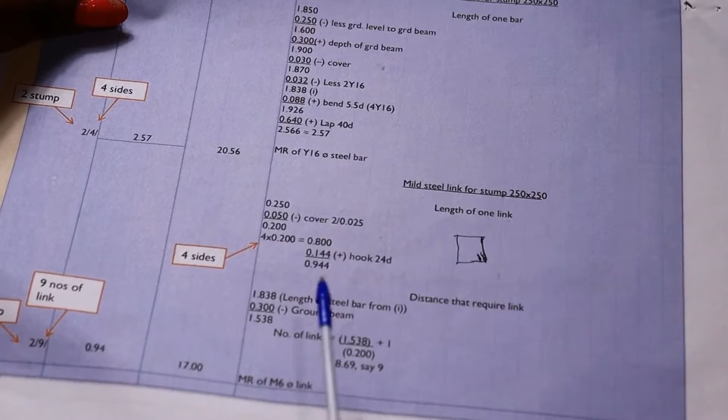It was the stirrups for the stump, the links for the stump 250 by 250. So this one was for the stump 250 by 250. The other one was for the links or stirrups for stump 200 by 200. So we get the total of this one and the other one.

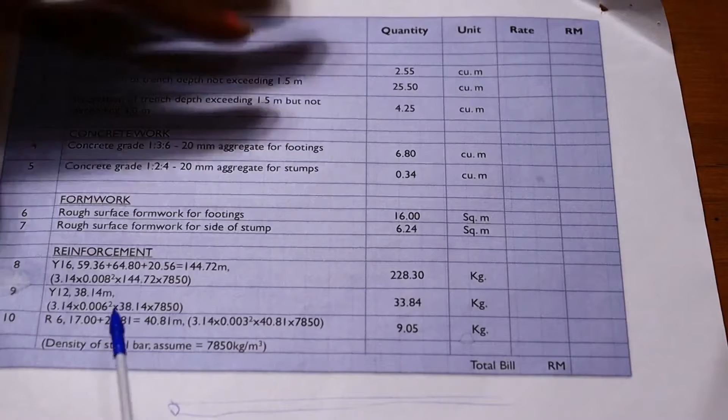So the total for R6 shall be 17 plus 23.81. We get 40.81 meters.

So to get the volume of those reinforcement bars, pi R squared times the length. The diameter is 6, the radius is 3. So then we multiply by the density to get the mass. So the mass of the R6 shall be 9.05 kg.

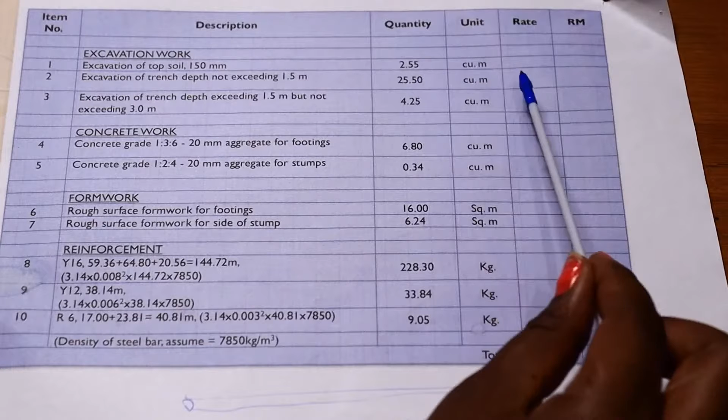So when we want to get the total cost of doing all these things, we'll just put the rates in the columns, then multiply quantity times rate to get the cost. Then when we add all these costs, we shall get the total cost for doing the excavation work, concrete work.

formwork, and reinforcement. Alright, so we are done with the takeoff for the reinforcement, excavation, and formwork for the foundation concrete columns, in the stumps, and in the footings.